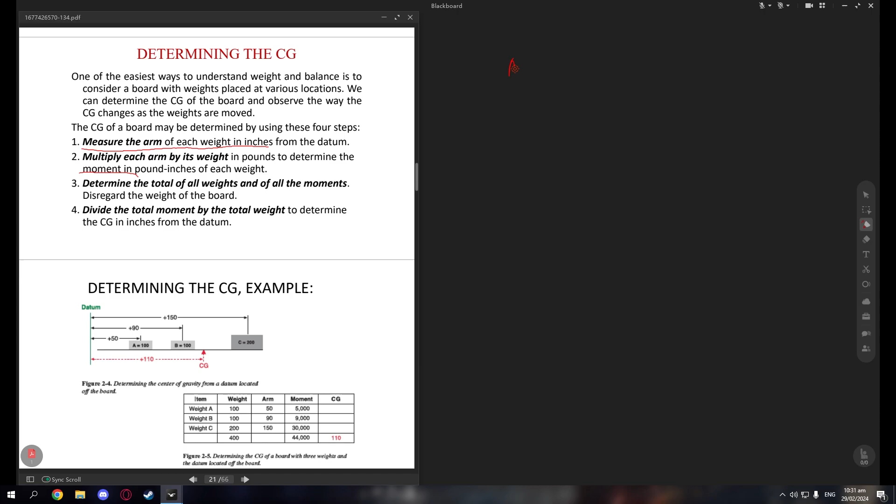So, para makuha natin si moment, the formula is moment is equal to weight times arm. Okay? Weight times arm. So, multiply each arm by each weight in pounds to determine the moment in pound inches of each weight. So, makukompute daw natin si moment by multiplying weight and the arm. Okay, then number 3 is determine all of the moments and all of the weights.

Bakit kaya? So, balikan natin si formula ng moment natin, weight times arm. Kung makuha natin summation of all moments, tapos meron din tayong summation of all weights, ano yung summation of all arm? Hindi natin isa-summation yung arm natin, kundi kukunin natin siya by having summation of all moments and summation of all weights on the other side of the equation. So, si CG kasi is yung arm natin for all of the weights and all of the moments. Si CG daw yung distance from the datum line where all of the weights are experienced.

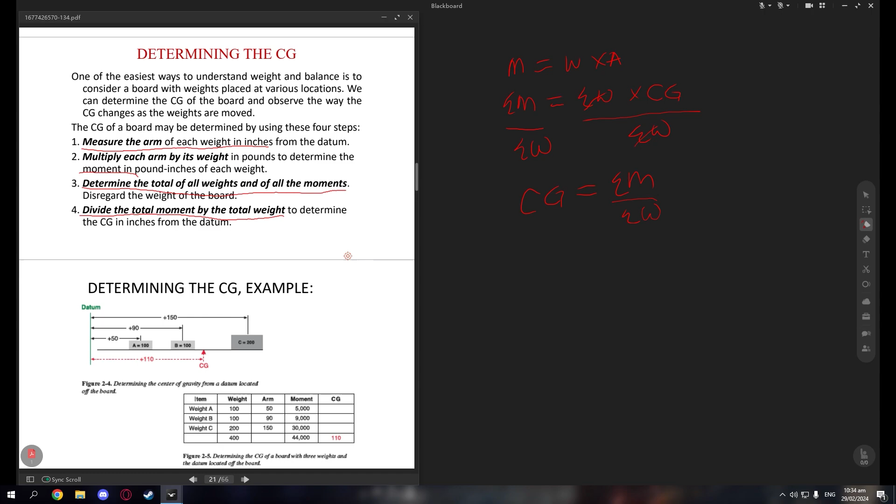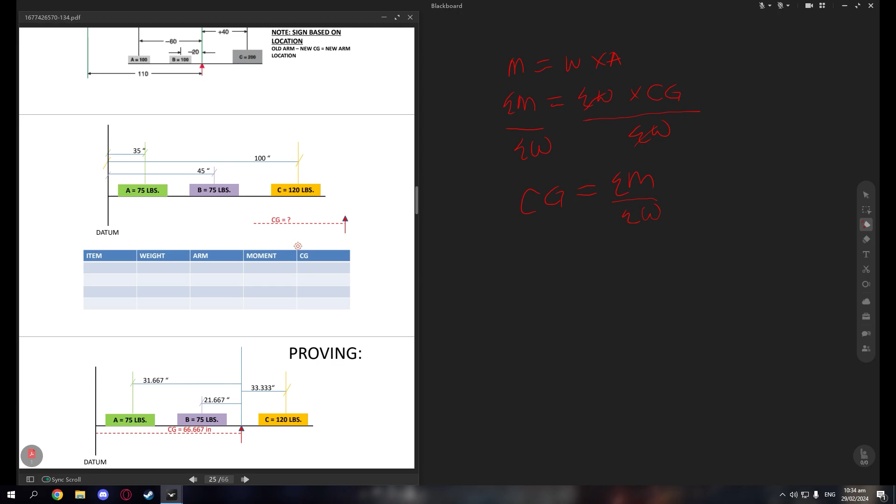Therefore, for our step number 4, we divide the total moment by the total weight to determine CG from the datum line na binigay sa atin. So, try na din natin. So, we have this figure on determining CG. We have item A, item B, item C. Pagpasensyahan nyo na yung sulat ko kasi hindi tayo sanay mag-online sa gantong platform.

We have item A, step number 1 natin, measure all the arm and all the weight. So, yung weight natin, given naman na, tsaka yung arm natin. So, 75 pounds sa item A, 75 kay item B, then 120 kay item C. We have 35, 45 inches, and 100 inches kay item C, yung arm natin, from the datum line. So, nagawa na natin si step number 1.

Step number 2 is multiply weight times arm, para makuha natin yung moment each item. So, we get 75 times 35 for item A is 2,625. Guys, pakilagay ng mga units natin para hindi tayo malito. Lahat dapat yan in pounds sa weights natin. Yung arm natin is always in inches and yung moment natin will be pound inches.

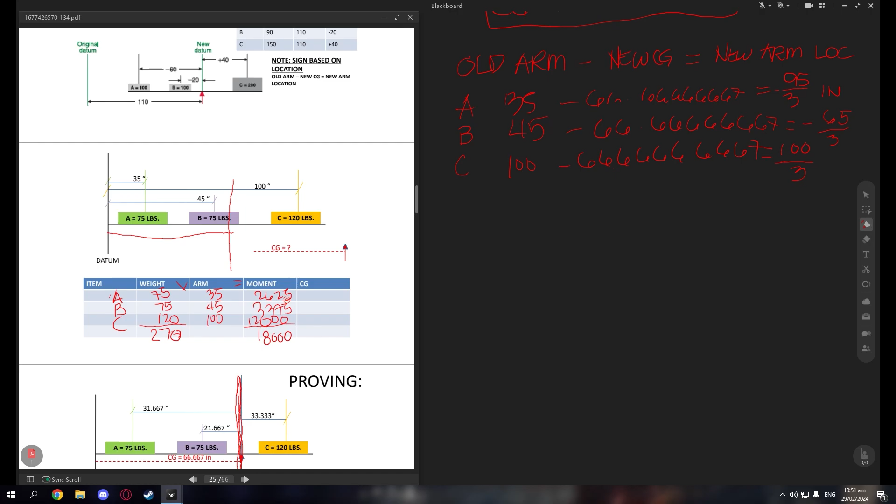So, again, number 1, weight and arm per item. Number 2, multiply weight and arm to get the moments of each item. Number 3, summation of all weights and summation of all moments. Then, number 4, we divide total moment by total weight. Then, prove lang natin. So, proceed na tayo sa next topic, which is shifting the CG. Most common problem is moving passengers and cargo from one place to another.

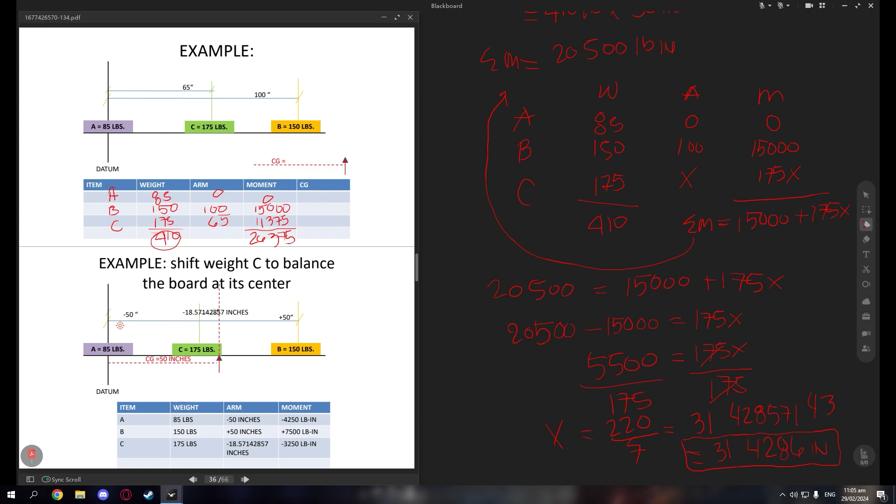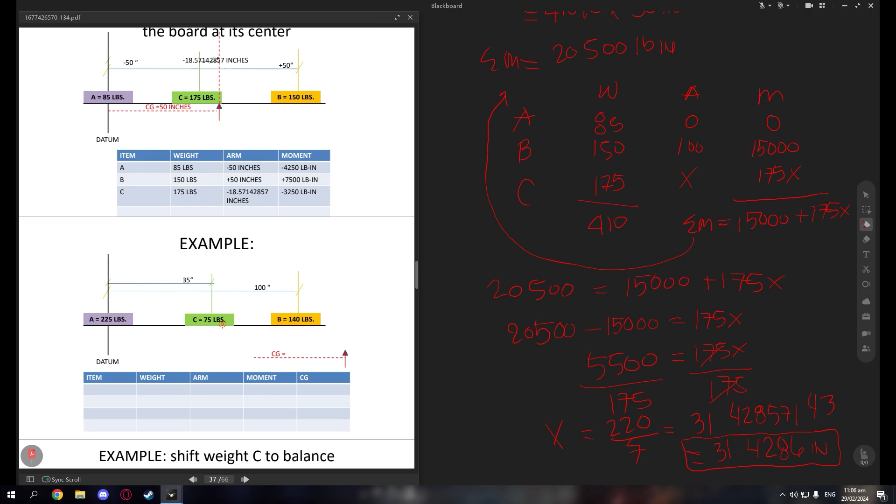31.4286 inches from the datum line para makuha natin si CG is equals sa 50 inches. Okay? So, yun. Yun lang siya guys for shifting. So, yun lang siya for shifting.

Then, pwede naman natin siyang i-prove. Ipo-prove natin siya gamit na yung original, yung bagong arm ng item C natin. Okay, paano na natin siya mapaprove? Since ililipat natin si CG natin, for proving, ililipat natin si CG natin sa location ni 50 inches.

So, old arm, lagyan na lang natin OA para hindi ganun kahaba yung sinusulat natin. Old arm minus CG, which is 50 inches na ngayon, is equals to new arm, NA. Okay? So, we have item A, B, and C. So, item A natin, ang location niyan, ang old arm niyan ay 0.

Ang item B natin naman is 100. Ang item C natin, ang gagamitin na natin dyan is ito na, or yung full value, which is 31.42857143. So, i-minus lang natin siya by 50 minus 50 and minus 50.

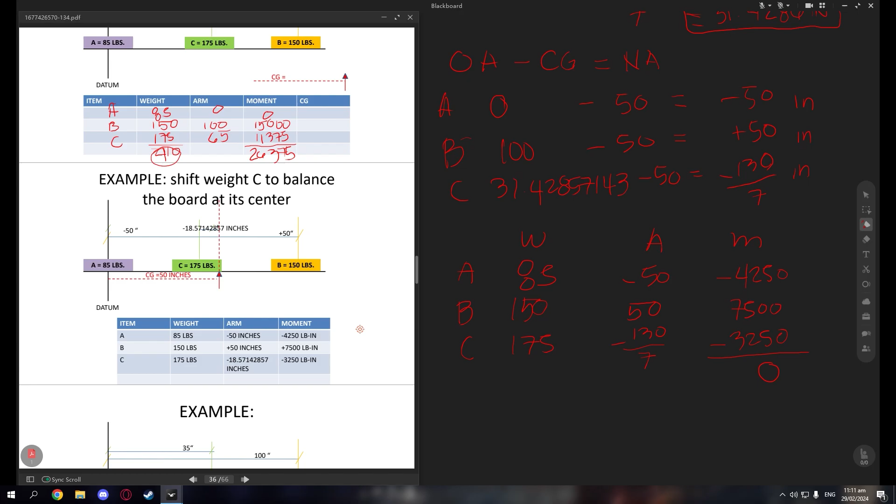So, ibig sabihin, proven siya na at 50 inches, kapag ang item C natin nilocate natin sa 31.42857143, ang makukuha nating CG dyan is 50 inches. Okay? Ito na yung nag-prove sa kanya. So, that is how you get CG. Shifting CG, or shifting an item to get the proper CG or proper location of our CG para maayos. Okay? So, that is shifting CG.

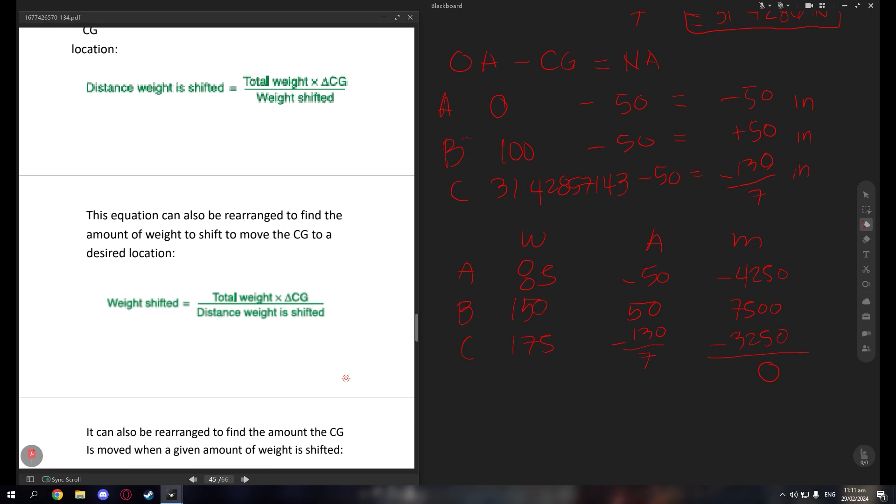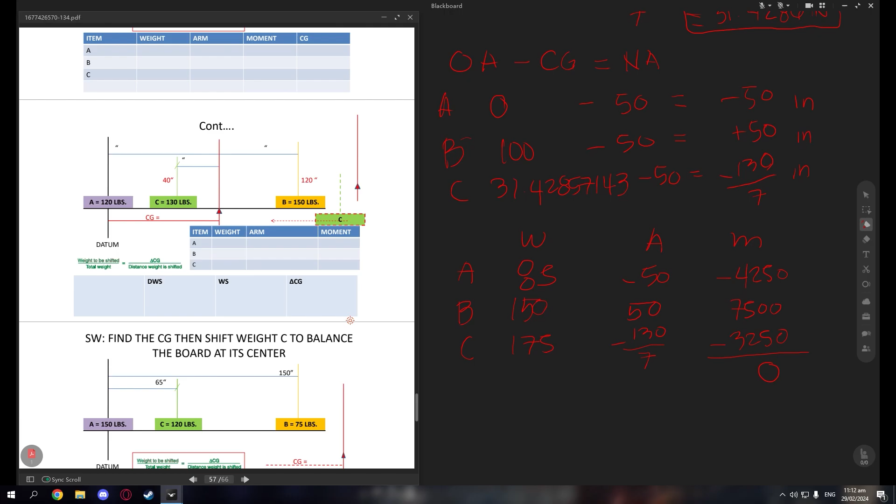Ayan siya. Then, pwede din tayong gumamit nung other. Kung may alam kayong ibang process, pwede naman. Okay, but let us continue with our next topic.

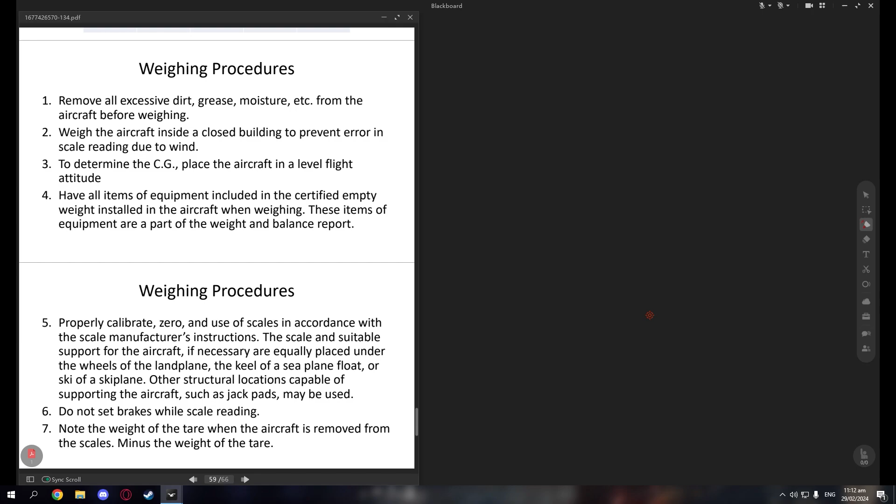So, lahat ng yun, i-apply na natin sa aircraft. So, before tayo mag-proceed, alamin muna natin to. So, weighing procedure sa ating weight and balance. Before tayo mag-weight and balance, para sa weight and balance report o yung records natin, yung document natin for our aircraft, ito muna mga kailangan nating gawin para hindi tayo magkaroon ng discrepancy sa mga readings natin.

So, number 1 is remove all excessive dirt, grease, moisture from the aircraft before weighing. Definitely, kailangan maalinis ang ating aircraft para hindi madagdagan ng weight. Hindi natin alam yung bigat, yung mga dirt pala na nandun ay sobrang bigat na nakakadagdag na para magkaroon ng discrepancy yung ating aircraft.

Weight and balance. Then, number 2, weigh the aircraft inside a closed building to prevent error in scale reading due to wind. So, kailangan daw nasa closed space yung ating aircraft before proceeding with the weight and balance report o yung pag-i-scale ng weight natin. Since, pag tinamaan yung aircraft natin ng wind, possible na magkaroon o makakreate ng lift yung ating aircraft.

Then, to determine the CG, we must place the aircraft in a level flight attitude. Hanap tayo ng level flight attitude na sample. So, level flight means flying at a constant altitude, not going up or down.

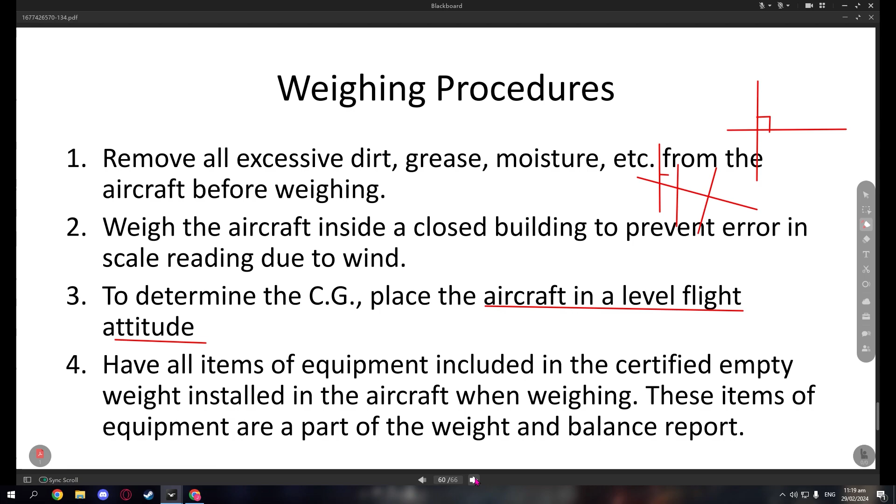So, saan ba pinapatong? Gumagamit tayo ng weighing scale. Ang popular sa atin dito is using the weighing scale. So, para mapa-level flight attitude natin yung aircraft, nilalagyan natin ng jack, chocks, o supports yung ating aircraft while nasa scale siya. So may added weight na hindi naman talaga dapat included sa aircraft natin. That is why we note the weight of the tare when the aircraft is removed from the scale. We minus the weight of the tare.

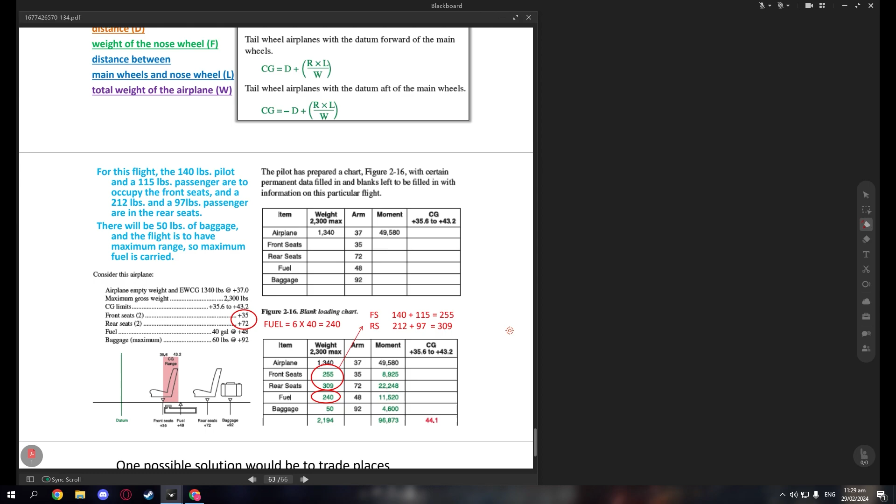gawin na natin siya. So, for this flight, the 140-pound pilot and a 115-pound passenger are to occupy the front seat, and a 212 and a 97 passenger are in the rear seat. There will be 50 pounds of baggage, and the flight is to have maximum range. So, maximum fuel is carried.

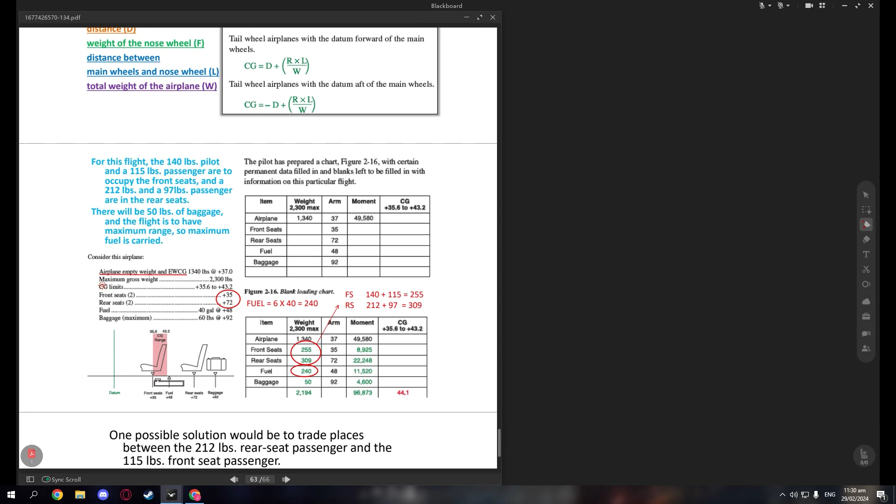Okay? Then, we have the maximum gross weight. The maximum gross weight is the maximum weight na capable ang aircraft natin. So, hanggang dun lang daw siya pwede yung bigat niya. So, we have 2,300 pounds for our maximum gross weight. Then, we also have the CG limits, which is tinalakay na natin, plus 35.6 to 43.2. So, dyan lang daw pwede pumasok yung CG na makukuha natin sa buong aircraft natin.

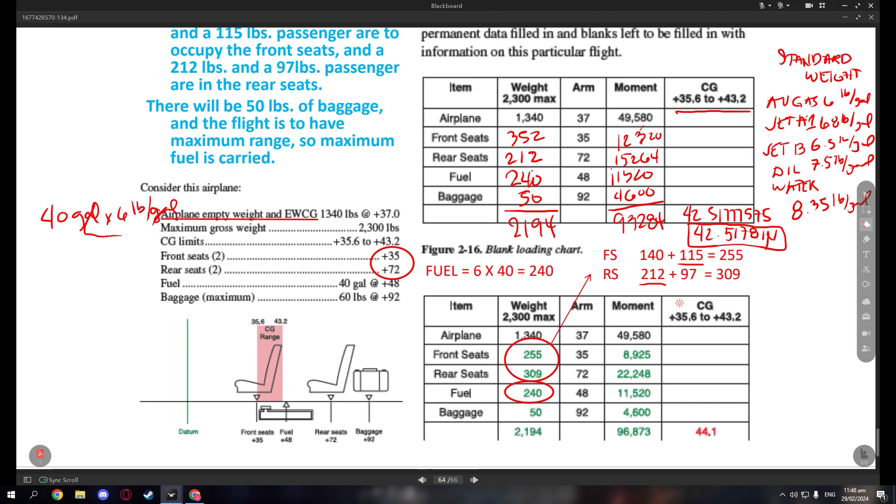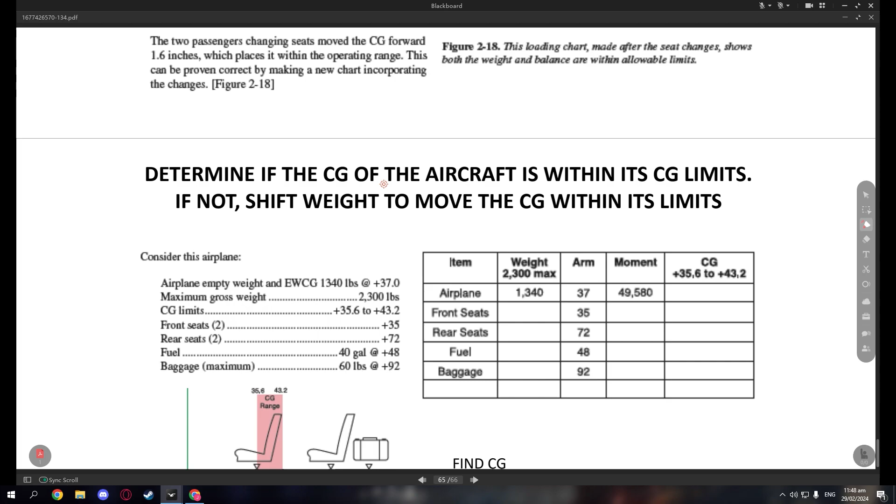Determine if the CG of the aircraft is within its CG limit. If not, shift weight to move the CG within its limits.